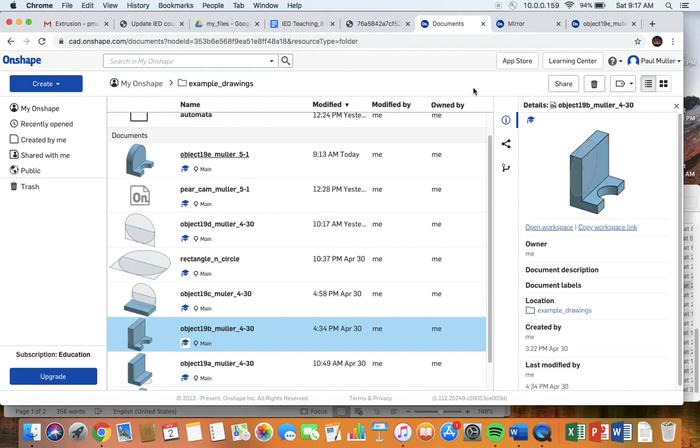All right, we're going to try to make this object here, number 19, and we're going to focus on extruding, mirror function, and sharing.

So some of the dimensions here: this bottom piece, this base, is 0.25 inches tall, one square. This whole bottom piece is 7 squares or 1.75 inches. This dimension here is 6 squares or 1.5 inches. This height is 6 squares or 1.5 inches.

So I'm going to start off by drawing first just half of this base, extruding it up 0.25 inches. I'm going to draw another rectangle, and we're going to add a circle to that rectangle to get this arch. Okay, so this is what it will eventually look like.

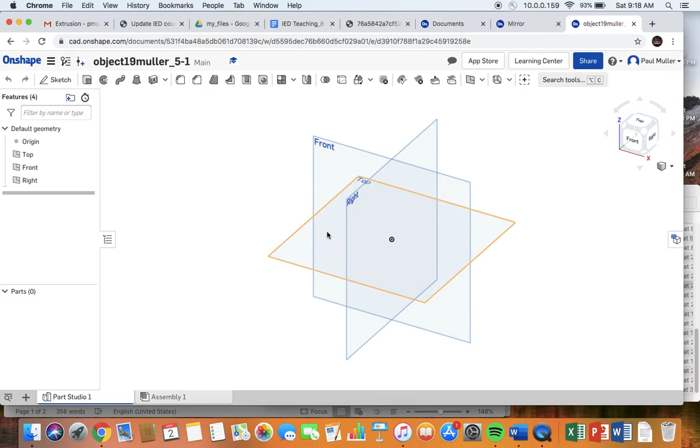All right, since I'm going to start with the base, I'm going to work on this top plane. So I'm going to click on the top face. I'm going to click on Sketch. I need to tell it what plane I'm working in. I now need to say that I'm making a rectangle. I'm going to choose this origin as the start. I'm going to click, drag and click.

Now I can put in my dimensions. It's asking for this X dimension first. That might have been hard to see. That'll be my 0.875, that is half of the 1.75.

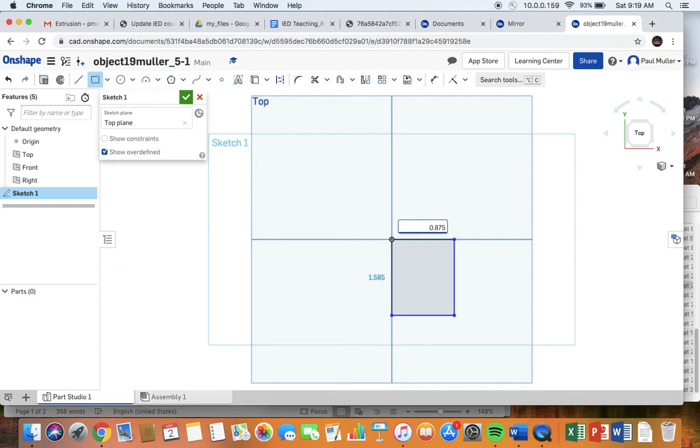Again, I'm going to mirror. Let's go back to that image. I'm going to mirror this right half to create the left half, so I'm only drawing half of the object right now. So this dimension that I just showed you of the rectangle is 0.875, half of 1.75.

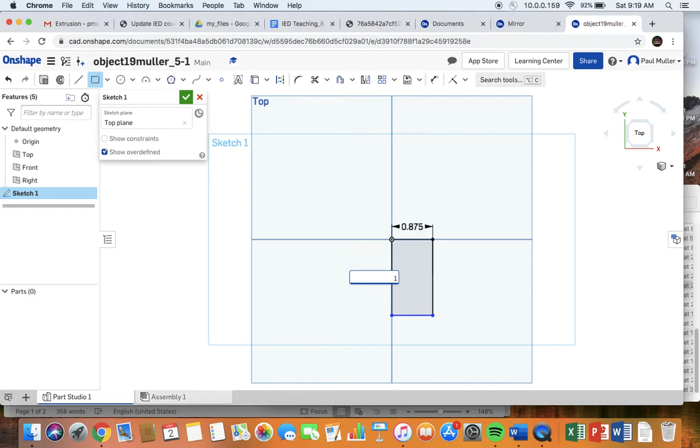Now I'm putting in the other dimension, 1.5 inches. All right, so this rectangle is now done.

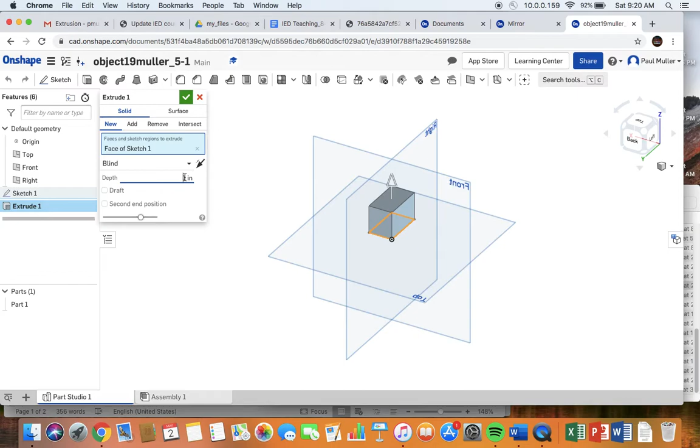I'm going to click on it so that I can extrude it. If we look at it in this way, I need to now type in how much it's being extruded, 0.25 inches, and hit enter. I then need to check to finish the extrusion.

Okay, so now I'm going to make a rectangle and circle on top of the rectangle to make this vertical part. This is 1.5 inches tall, 1.5 inches wide, so I'm going to make a square that big. I'm going to put a circle right on top of this with a diameter of 1.5 inches. We're going to use constraints to shape it in the right place.

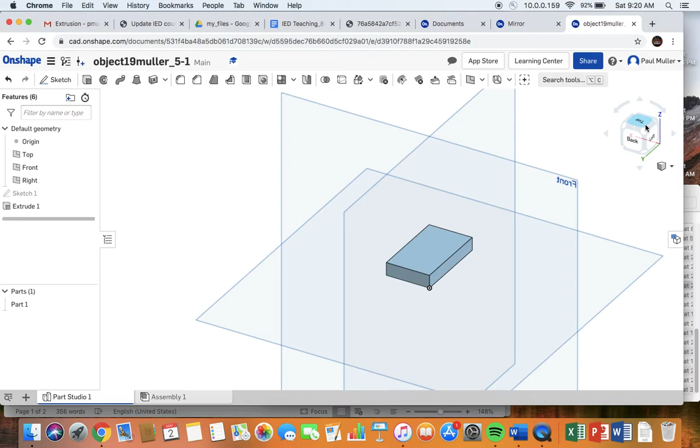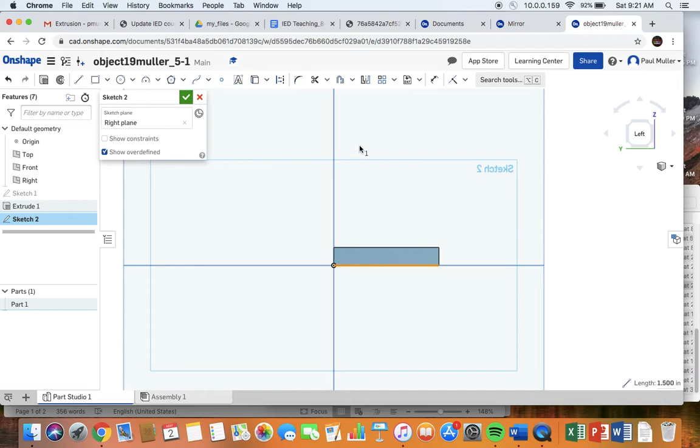Okay, so I'm going to work on this face here of that base plate. I'm going to again start by making a sketch. I'm telling it what plane to go in. Click here on the origin to start my— whoops, cancel that, must have made a mistake.

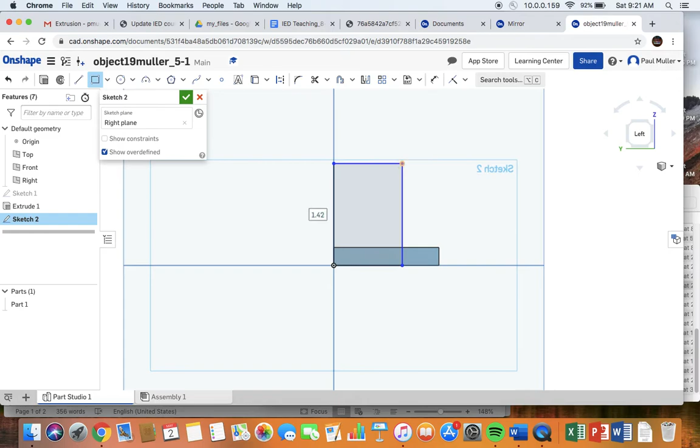Let's start again. Let's make a rectangle by hitting sketch, telling what plane to work in. Now I need to tell it to make a rectangle. I'm starting from the origin. I click and drag, I click to somewhat finish the rectangle, but now I'm going to type in the dimensions, 1.5 inch on that one. Enter, 1.5 inch on that dimension as well.

Now, I'm not going to click this green check mark here, because I need to add to this. I'm going to add a circle. So I'm going to draw a circle. Don't worry about trying to get the circle in the center, but you do need to drag and click and then type in the dimension. I need a 1.5 diameter circle.

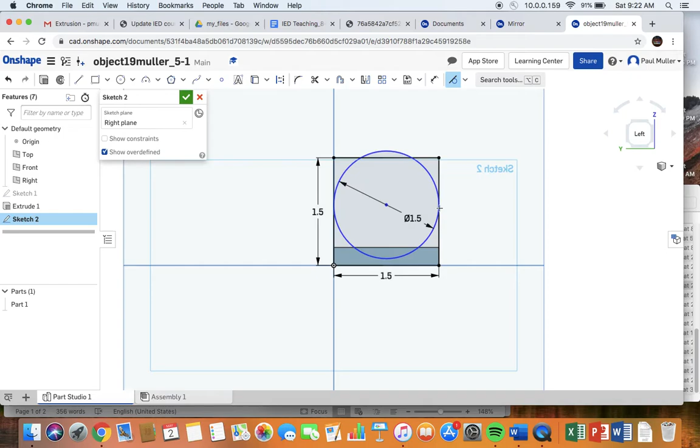Okay, now we're going to use constraints, and I'm going to go over here on the right top side and find the tangent constraint. You need to click twice on the two objects that you want to be tangent. I want the circle to be tangent to the square, this part of the circle tangent to this part of the square.

All right, so now everything, I could click on this check mark, right? I think I'm done, right? But no, you want to trim parts of the circle and parts of the square to get that arced shape that we're trying to create here.

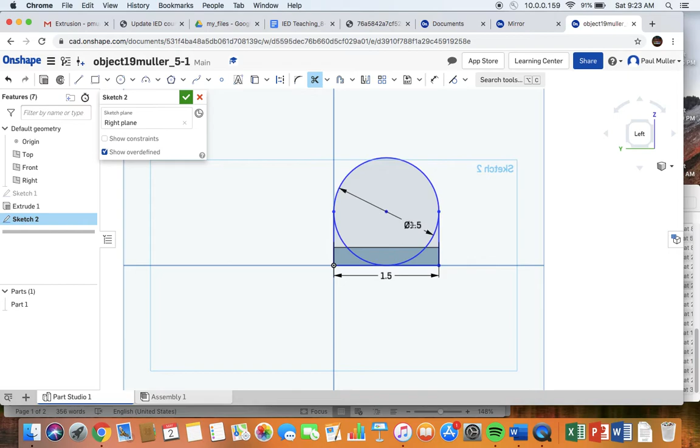I'm going to click on the trim command, the scissors icon in the center of the ribbon. Then I'll click on the things I want to trim away: that and that, that and that, and that, and that. Now I can click on the check mark to finish the two-dimensional sketch of that object. I'll click on the corner so you can see what's going to happen.

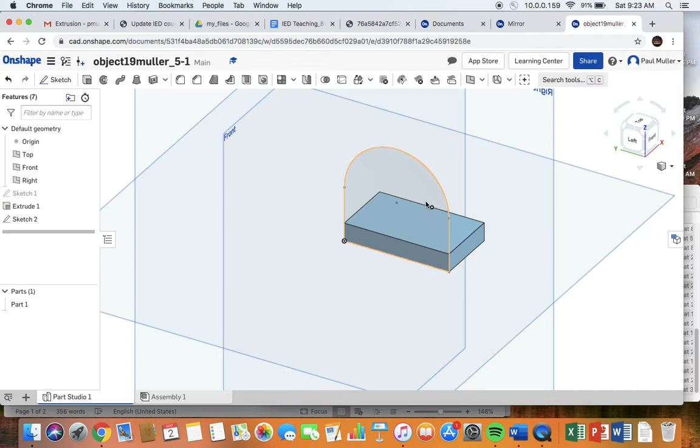Now we're going to extrude this shape. I'm going to click on this shape, then come up to the left corner and click on extrude. I want to add, but I don't want it to be that big.

So what dimension do we need to put in here? If you look in the document, this is 3 squares wide, that's 0.75 inches, but I only want half of that, or 0.375. So I'm going to type in 0.375 for the extrusion length, and then click on the check mark to finish that off.

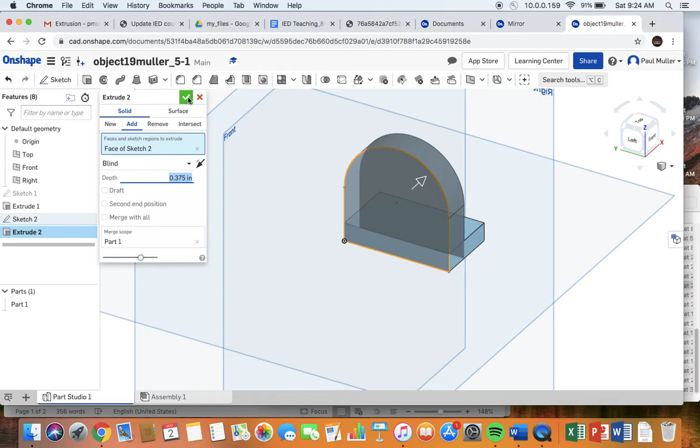All right, success. We now have this wonderfully created half.

I'm only going to create one of the holes here just to demonstrate how to do that. The hole, as you can see from the diagram, this hole on the right side, it's half of a hole, will be an extrusion. So I'm going to work on this top surface.

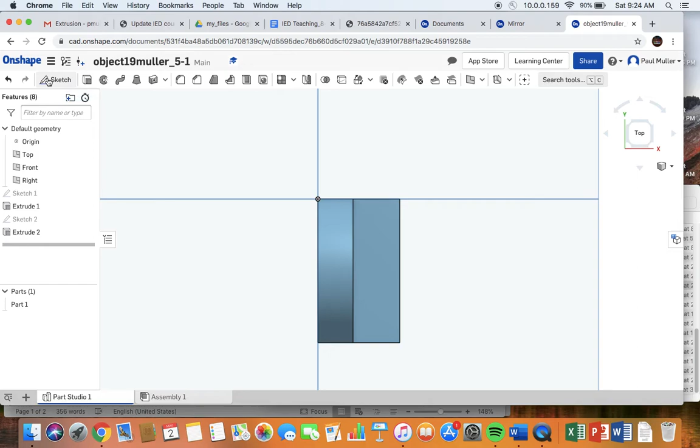I'm going to click on the top, zoom in, and sketch both a line and a circle. The reason I need a line is to find the center. Let's see if we can do it without first - let's do a sketch, tell it what plane we're in, click on circle, and see if it finds the center.

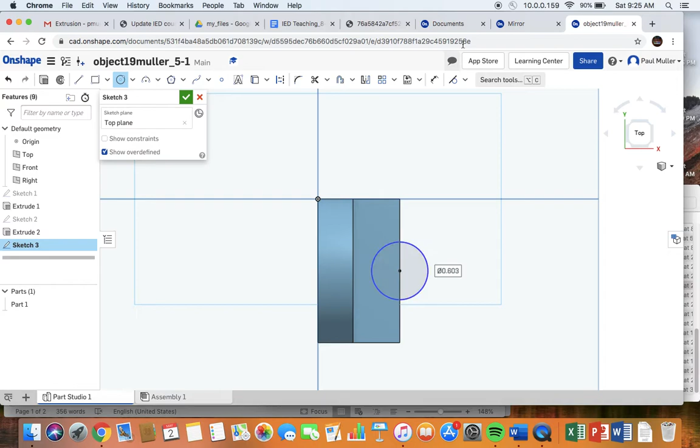Okay, I clicked where I think was the center. I'm dragging and clicking again, but now I need to type in the diameter of the circle. The diameter is difficult to see, but it's 3 boxes in diameter - 2 boxes in the center, and half a box on each side, for a total of 3 boxes, or 0.75 inches. So now I need to type in 0.75 for my diameter, enter.

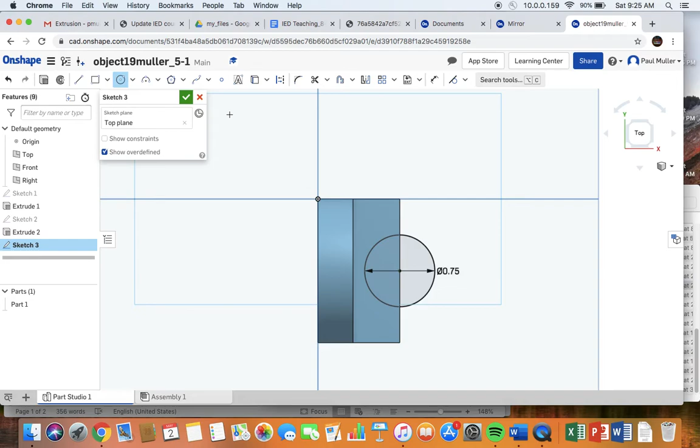I'm going to finish that two-dimensional drawing. I'm going to get a three-dimensional view of this. All right, and if we zoom in, it looks like our circle is on the bottom.

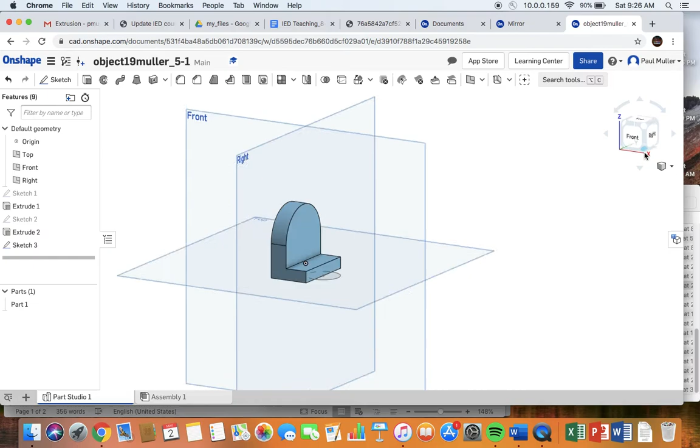So what we're going to do is cut out this part. I'm going to click on it first, then click on extrude. I want to do a remove. I need to make sure the arrow goes in the right direction, so I'm going to pull on the arrow in this direction. And then lastly, I'm going to type in how much it needs to be extruded, the depth of this hole. In this case, it's 0.25 inches.

Whoops, something's wrong. Remove, 0.25 inches.

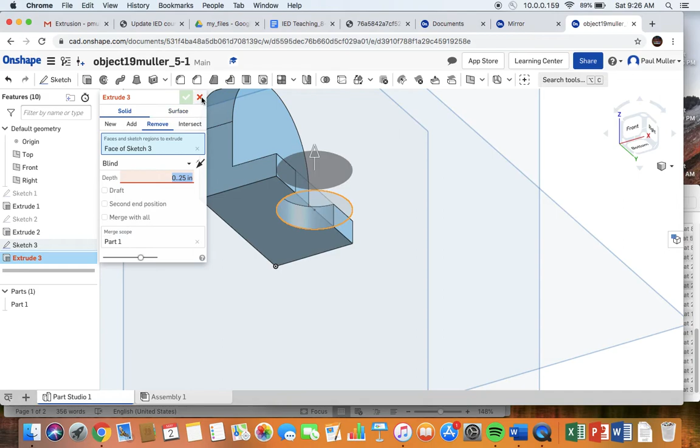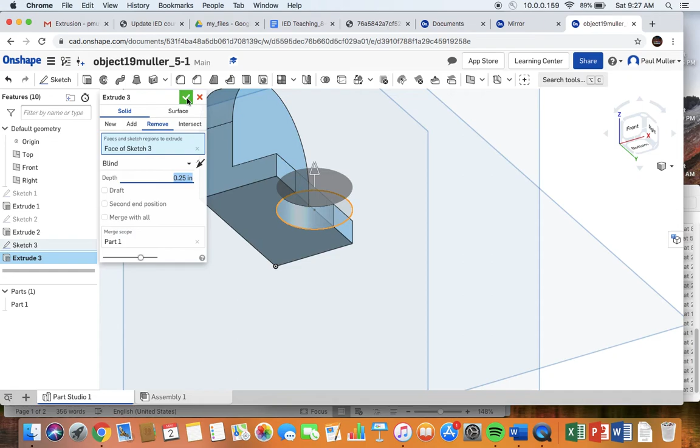All right, let's try that again. Let's click on this, let's click on extrude. We're doing a remove, but the remove is in this direction, and it's 0.25 inches. And then I'm going to click on the check mark to finish it off.

All right, so this is a big success. We now have half of, with the exception of the hole here, we have half of our object. And now I'm going to mirror this.

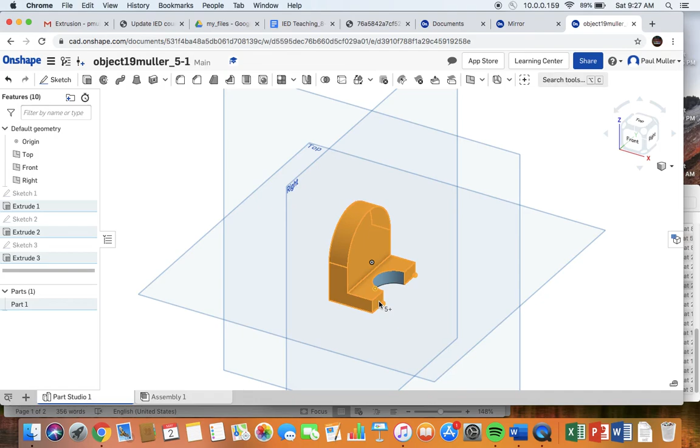So to mirror this, you need the mirror command right here, but you also need to check on what you are mirroring. So first I'm going to click, shift click, so that I get everything. And now I am going to come up here to the mirror command right here in the center, it looks like a U sort of. I'm going to click on the arrow part of that.

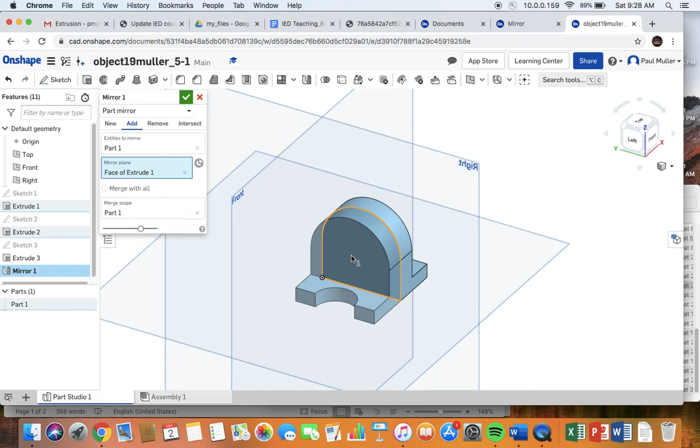Now I'm going to click in where it says mirror plane. I'm going to rotate this and click on the plane around which I wish to mirror. Now I'm going to click on the check mark to finish, and now we have a mirrored object.

We've made the entire object. Thank you for listening.